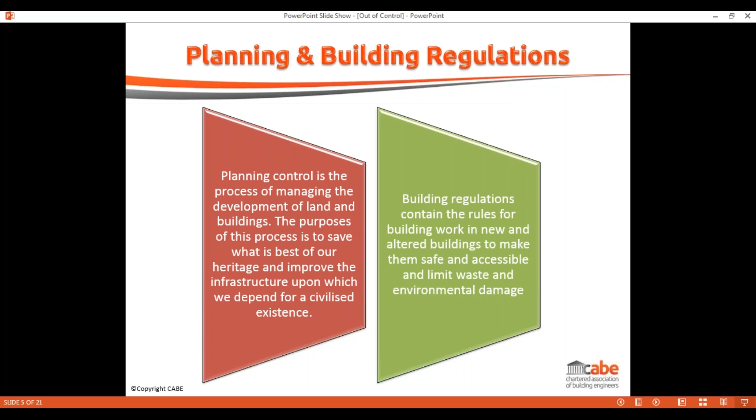So I'm going to start off looking a bit more at the planning side of things and permitted development. These are the bits that can be done without resort to a planning application.

Some permitted development that we're allowing for properties at the moment has been set down as being permitted, not needing full planning permission, for a temporary period. Those of you who watched how the planning system was developed will have seen that we had a temporary easing of permitted development, and that temporary easing has been renewed now until 2019.

So theoretically, some development is allowed between now and 2019. It is possible that after that date it will come back under control for anything of a similar nature in the future, although having been exempted out for a while, it perhaps is a little bit more unlikely that that will happen.

When you're advising clients, when you're looking for information yourself, it is important that you look at the correct bit of legislation. There are some guides online talking about older conditions. The current principles are enshrined in the Town and Country Planning General Permitted Development England Order 2015, which details what can and can't be done, what has been given blanket approval. It is worth reading that in quite some detail, because there are some nuances in some of the work that can be carried out.

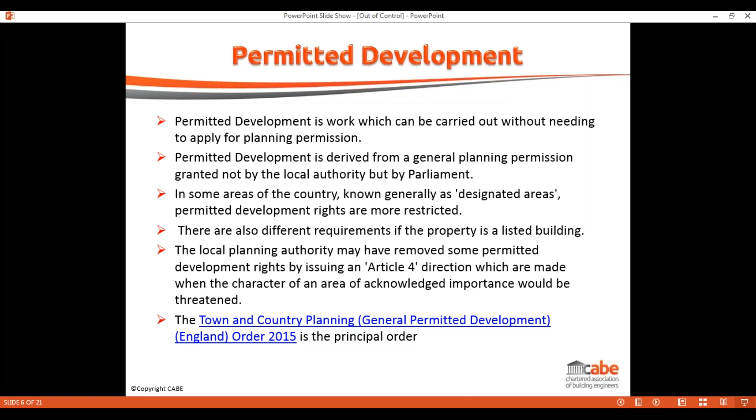So if we look at some of the sorts of things that people can do without permission, I'm tending to focus in the first instance on the domestic stuff. Obviously, the main issue when somebody's looking at putting an addition or an improvement or alteration to their property is that although it may be permitted, we're still looking to try and maintain a level of local amenity and a level of protection of the environment.

So the rules that determine whether or not you can do something will still have some blanket elements to them that will be aiming to achieve that level of protection.

So certainly we're looking at something that once we've enlarged, once we put an extension onto the property, we're not taking up more than 50% of the footprint of the curtilage of the property. We're not looking to take any new extension or alteration higher than the ridge of the existing roof. The eaves shouldn't be any higher than the existing eaves.

And when we've got an elevation, be it a front elevation or a side elevation that's facing onto a highway, we shouldn't extend upon the front of that, or as we would perhaps have called it in traditional terms, beyond the building line, although that's not a term that's used in the order anymore. And then there are some additional requirements.

In terms of the amount that the extension can exceed, it can't exceed too far to the rear or too far to the side, and those are the bits that vary depending on the order that gives us more time up until 2019 for a slightly relaxed standards. And then a general overall issue about extensions and heights of extensions.

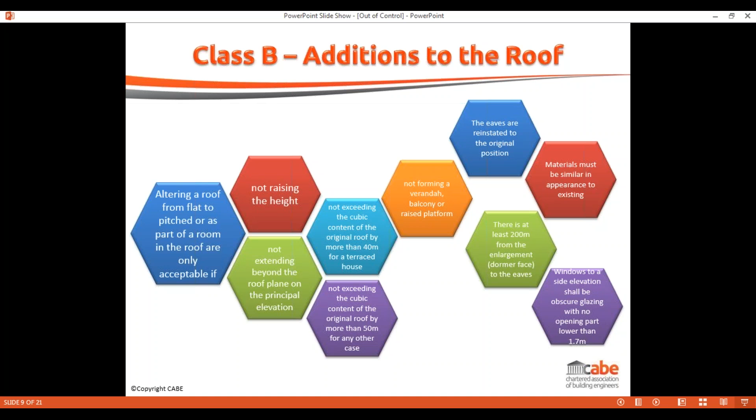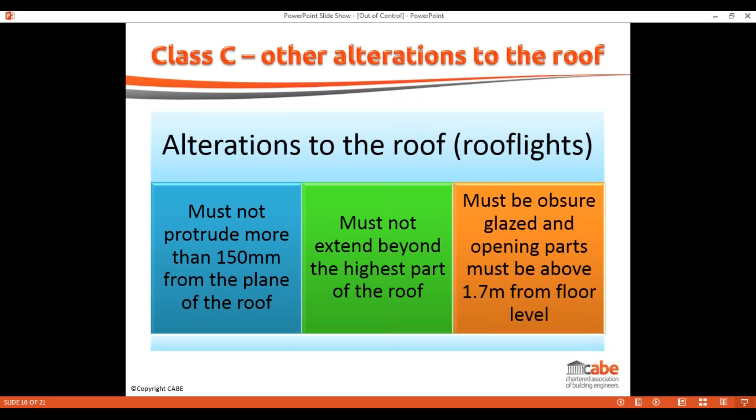Other things that we might be doing to the roof could be things like chimneys, flues. There are separate requirements that deal with things like installation of solar panels, so again there are controls on those, but slightly different rules. But if we're doing an alteration to the roof, if it doesn't extend more than 150 mil, doesn't go beyond the highest part, or if it is something like a roof light with glazing, then we have to make sure we've got obscure glazing up to 1.7 so that we're not overlooking anybody else round and about. So it is all about protecting that amenity.

One of the slightly more confusing and out of step elements with permitted development is a simple little ground floor extension, something like a porch. A porch is dealt with separately than the Class A extension alteration type arrangement, because to a certain extent a little porch is allowed to sit on the front of the building beyond that existing building line. So that's a subtle difference and why it's dealt with differently.

One area of confusion is that porches are exempt under planning as permitted development, but porches have a different requirement for exemption under building regulations, and the two don't necessarily mean that one satisfies the other criteria.

With a little porch going on the front of the building or the side fronting a highway, it can't be more than 3 meters high, it's got to be 2 meters from a boundary or a highway, and the floor area mustn't exceed 3 square meters. These are intended to be very small weather porches for a little bit of weather protection.

Other bits and pieces we can put into the building that we don't have to worry about include things like ancillary buildings. Again, if we're putting something in the back garden, like a shed, an ancillary type building, or a swimming pool enclosure, we've got to look at the area of the property being developed.

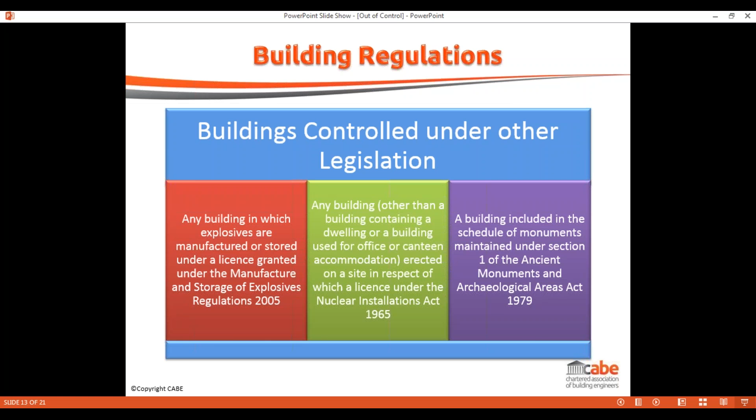Other sorts of buildings the building regulations won't deal with: because building regulations are about health and safety of people in and about buildings, if the building is one that people don't actually go into, then it may well be that it's not required to comply with the building regulations.

There will be buildings that people just go into occasionally to inspect maintained fixed plant or machinery, traditionally thought of as plant and service buildings. But in reality the question is now being raised about storage buildings or industrial buildings where everything is automated, and the exemption isn't really intended to catch that as well.

Having said that we're not dealing with the building because people don't go into it, we are then looking at the effect on people around the building. So there are some requirements even on detached buildings about how close they are to the boundary and to other buildings, so that should they catch fire they don't have an adverse effect on other people round and about.

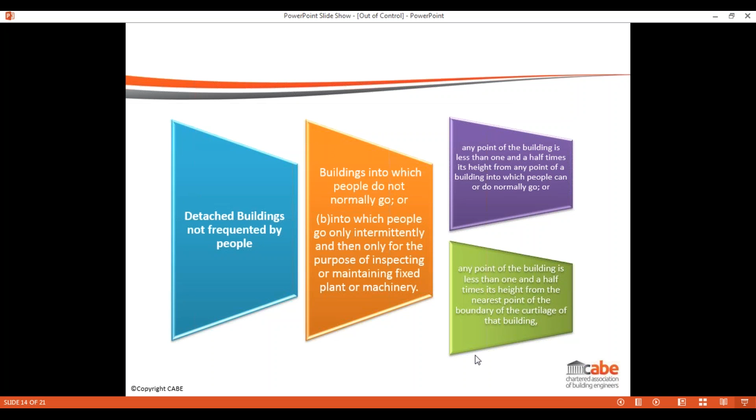Other types of building that are exempt: agriculture and greenhouses are generally exempt. There are some issues in terms of setting fire to other buildings, so we have to look at how far the building is from a boundary. We also have to make sure it is generally agriculture and a greenhouse with no sleeping accommodation within it, and a general basic level of means of escape so that we've got an exit we can get to from 30 metres within the building.

When we're looking at agriculture or horticulture, it is purely in terms of the activity, and if we end up with something that does agriculture or horticulture but is also a packaging plant or is open to the public for retail sale, then that no longer meets the requirements for exemption from the regulations.

I'm just going to try and pick up on a couple of questions that popped in, because I don't want to go too far beyond where people have asked the questions. So just flicking back through, right.

Somebody's asked, under the planning rules, where it says there's a requirement to use similar materials, to what extent is this enforced? For example, tile types - if the original roof had a plain tile and it's now being used as an interlocking one. Planning authorities will tend to look at whether to take enforcement, and it is enforceable if the materials aren't similar. Their main criteria will be whether it blends into the appearance of the property, whether there's a noticeable difference, and how much that's been mitigated in the work.

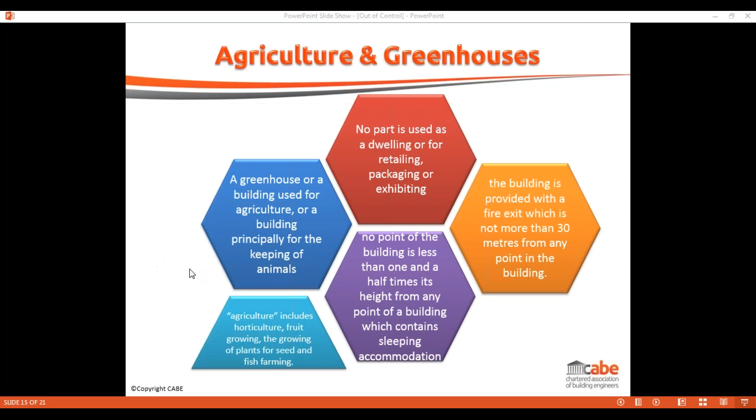Right, that's picked up a few questions. I'm now going to try and just carry on and pick up a few slides, and I'll come back to the questions again in a moment.

Right, temporary buildings. Any building that's not intended to remain where it's erected for more than 28 days. That's a straightforward issue, relating to semi-temporary accommodation. As with all legislation, there will be some nuances within the wording - not intended to remain where it is for more than 28 days. At what point does it then become an issue if it is there more than 28 days? In reality, as soon as you're aware that it's going to be there more than 28 days, then it may well need an application. It will then come down to practical things about whether things are enforceable.

I think the best example I saw of this was in a city centre location. In early November, a timber structure went up in the town square, which was going to be Santa's Grotto. Because Santa's Grotto opened in the middle of November and ran through till Christmas, it was technically going to be there for more than 28 days. But by the time processes and procedures had started to take any action about any deficiencies, the building would have been removed. So there has to be a degree of negotiation and talking to people about this.

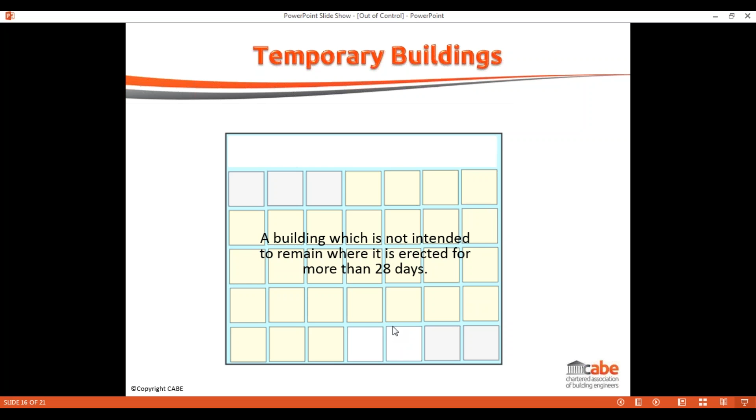Right, ancillary buildings then - buildings that we're putting onto the site in connection with what's undergoing. So things like site huts, site cabins on a building site or a civil engineering site will be exempt as long as nobody's sleeping in them. I'm unfortunately old enough to remember the industry a few years ago where, when we were really busy building houses, a lot of labourers actually slept in the site huts because it was cheaper than the local B&B. That would mean they're non-exempt.

If you've got a building on a site that you're using as part of the sale of plots on a building site, then that is exempt, unless of course it's going to be the garage or double garage of a property that's going to be converted back afterwards. So those sort of buildings that are there as an ancillary use are exempt. It doesn't mean that the people designing, positioning or using them don't have to do their own risk assessments to work out that things are going to be safe in terms of use. It just takes them out of the building regulation control framework.

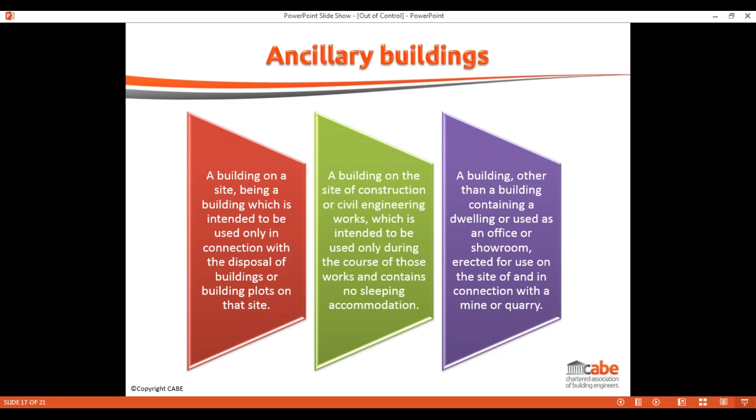And then detached buildings under the building regulations - this is where there's a clear difference between the definitions under planning for permitted development and what we find in building regulations. A detached, single-storey building, less than 30 square metres, with no sleeping accommodation, is exempt if it's constructed substantially of non-combustible material and it's a metre from the boundary. So the requirements there are really about fire spread between properties. There is a debate about what constitutes substantially non-combustible material. If you have a garage and it's got a timber roof on it, is that combustible or not?

What you really have to look at is what's going to happen if something's on fire. So if next door is on fire and something lands on the roof of this property, is it going to set fire to it?

A lot of people will take the view that if it's a pitched roof with a slate, clay, or concrete tile, they'll still consider that as substantially non-combustible, whereas perhaps a flat roof with a timber deck underneath isn't necessarily. But it's an interpretation issue.

30 square metres is round about small double garage size. A detached building less than 15 square metres has none of those other restrictions, and that allows either a small single garage, though it would be very tight, or it will allow things like sheds and the like.

Buildings intended to shelter us from a nuclear or chemical weapon, that technically is exempt, but we have to show that that's actually what it's going to be used for.

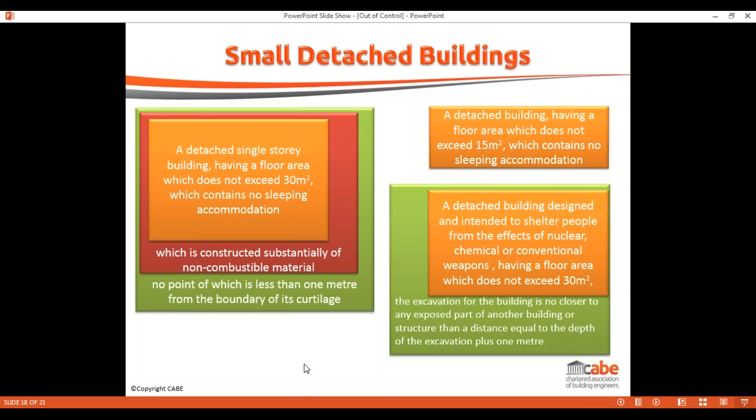Okay, are there any further questions this morning?

What's the logic for conservatories being exempt, somebody's just asked. I've got to be honest, it's a personal opinion - I don't believe there is any logic whatsoever. The original concept with a conservatory was that it's a glass box on the back of the property that makes no difference whether it's there or not. Because we then have to look at things like safe breakage of glass, and the ability to escape a window on top of the conservatory, there are some issues with it.

Certainly as we're focusing a lot on energy performance of buildings nowadays, the concept of extending a heating system in does tend to mean why should it be exempt. The reason the exemption is written the way it is in the building regulations is primarily if we clamp down on what people could do in terms of a conservatory being primarily glass - there's no difference in real terms between what people build as a conservatory and a porch. From the same slide you can see the exemption would allow you a 30 square metre porch under building regulations that may well be solid construction with a cavity wall and a solid roof.

So it does come back down to what it's being used for. Part of the reason the definition disappeared was because if you couldn't meet the criteria for what was considered a conservatory with the glazing, you just called it a very big porch. There's a slight difference of opinion in terms of how these things are heated and how that plays into the regulations and whether the exemption applies, between England and Wales. I wouldn't be at all surprised if at some stage it's reconsidered, but at the same time we have to consider how much society wants to restrict everything we can do to our own property. So it is a balance.

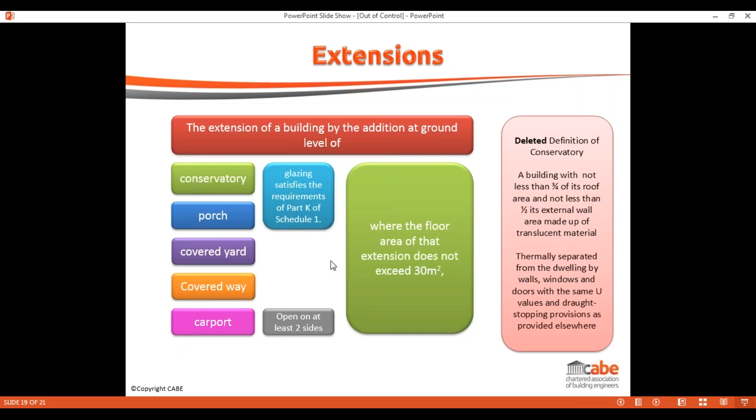As you'll have gathered from some of the questions and rather undefinitive answers, this is a bit of a minefield, and a lot of these things, if you're not sure, it's worth checking with the planning authority or the building control body. The issue is that the regulations are written by government, but when it comes to interpretation, it's down to the people enforcing it to determine the correct interpretation in these areas. So certainly in terms of planning, talk to the local planning authority.

In terms of building regulations, it's slightly different in that we have private sector building control and local authority building control, but most private sector building control won't want to get too involved with exempt work because it's not controlled - there's no application, no associated fee. But it's worth talking to a building control body to get advice if you need to consider interpretation. My main issue is always: what is it going to be? What would you market it as if you were going to sell the property?